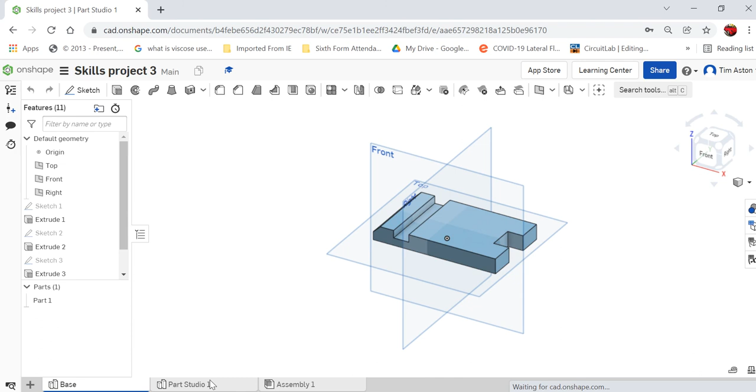The first thing we need to do is create a new part, or a new element here. So let's go create a part studio. We've got a new part studio here, and I'm going to right click on it and rename it base.

What we want to do now is create a new sketch. We're going to create a sketch on the right hand plane, so I'm going to click on this plane here and click right, so we're looking at it square on.

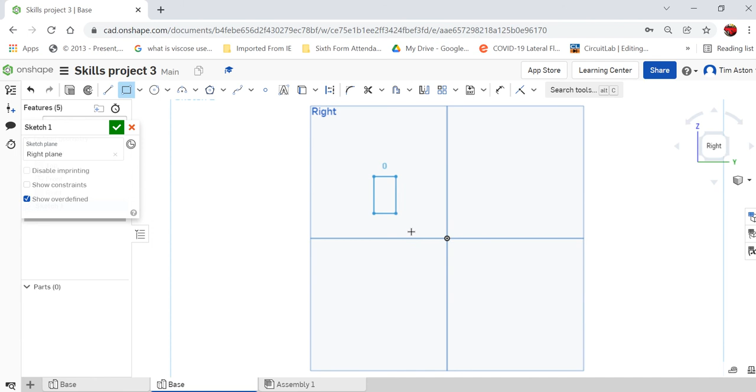So we've got a square sketch and we're going to draw a rectangle, and this one wants to be 70 by 70. So I'm going to type in 70, click the return button, then type in 70. So that is 70 by 70.

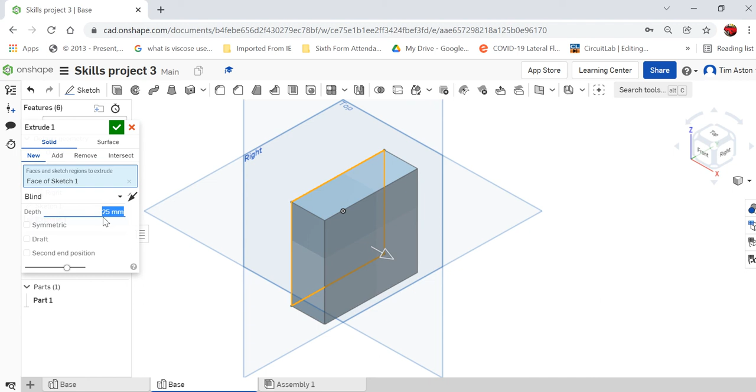I can then click isometric, and we can turn this from a 2D sketch into a 3D solid. I'm going to click the extrude button, select the solid, and this wants to be 15 millimeters thick. So I'll type in 15 and click my tick.

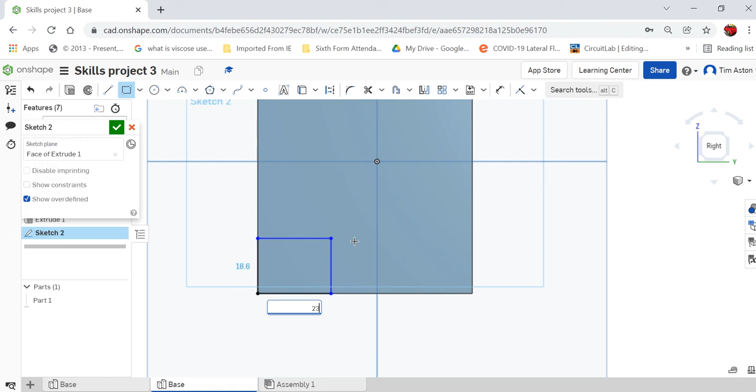Okay, so the next thing we need to do is create the finger joint. We're going to create another sketch. I'll click on sketch, click on that plane there, and click right, so I'm looking at it front on, and I want to draw two rectangles. The first rectangle here wants to be 23 by 15.

I'm going to draw another rectangle here, and again you see the extension lines it's grabbing there. This makes it easier for me, so I know it's going to be 15 high, so I can just select the 23 there and it keeps it at 15. So I can then click my tick.

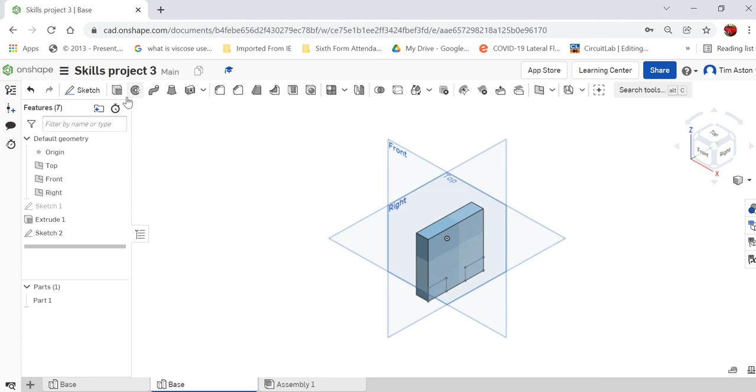Select the isometric view, and if I click the extrude button and extrude that there and that there - now instead of adding material I want to remove, so I'm going to go the other way, click remove, type in 15, and click the tick to confirm it.

So the next thing we want to do is drill a hole, because we're going to put a bolt through here to fix the tube in place. I'm going to start my sketch, click on this plane here again, click right, and I'm going to draw a circle.

I'm going to position it there. Now that wants to be - the circle could be 4 millimeters diameter. That doesn't actually matter because we're going to change this, and I'm going to use the dimension tool to position it.

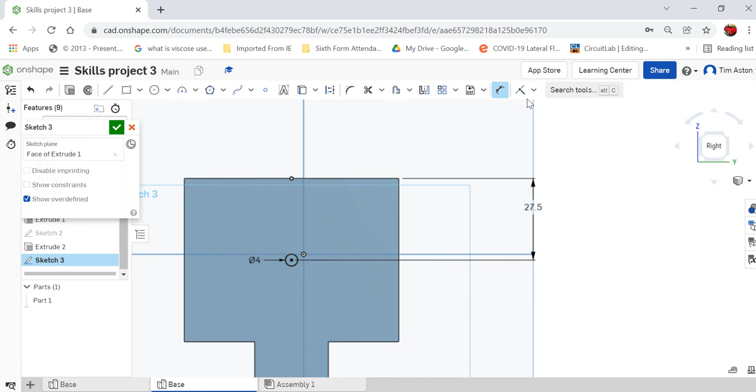So I want to position it from there, and that wants to be 27.5 millimeters down, and it wants to be in the middle, so it needs to be 35 in from the side. So I'm going to click the center of the circle, this line here, and that's 35, because you noticed I took it off that extension line, it found the center and extended, and it put it in there for me. So I'm going to click my tick, and that is the start of my hole.

So I'm going to click the isometric back in there. Now what we can do now, I could just literally extrude that, but we're going to use the hole tool now, which is quite a handy feature.

I'm going to go to the hole tool at the top here, select that, zoom in, and select that point that we've got from there. Now fortunately these sizes here are exactly as I want them.

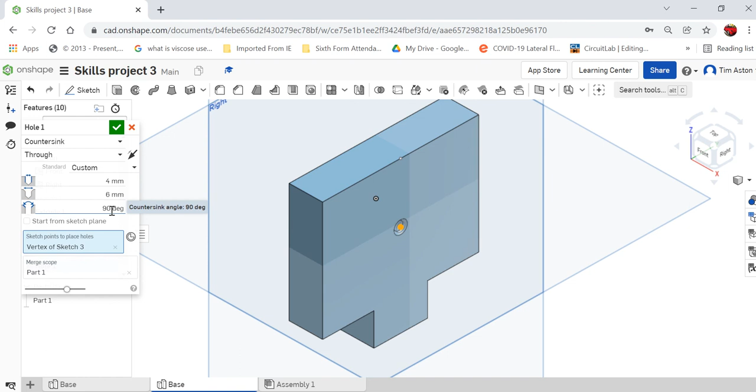You can change these - you can change the width of the hole, the width of the chamfer, you can customize it here - but what we want the hole to be is 4 millimeters width. The chamfer width at the top is 6, and the chamfer angle is 90 degrees. But you can play around with these so you can see how they work.

So select the hole, click that there, and we have our front. So that is that part there. Good luck.